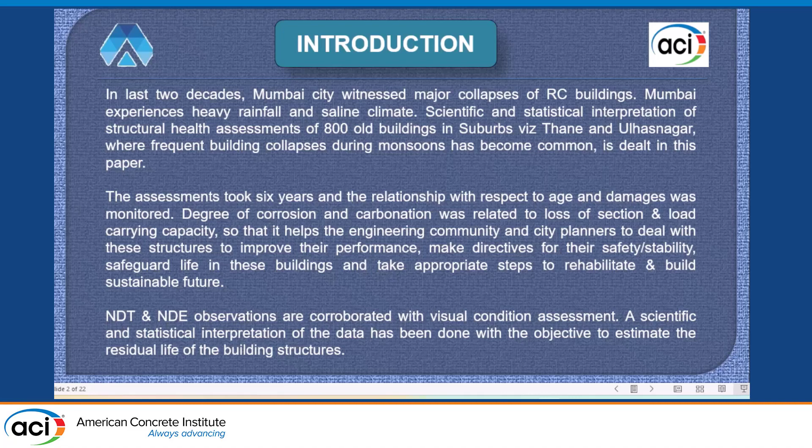What I was telling is, advanced technology is a boon as a result of learning from failures. Failures have always guided us in making new innovations, technologies, and research. Such incidences and socio-economic issues have inspired the author, that is myself, to do such big data analysis.

I am Aniruddha Nakhawa, structural engineer from Mumbai, presenting to you the state-of-art assessment of 800 non-engineered and engineered buildings in Mumbai for corrosion, damage, and residual life.

As we know, Mumbai is experiencing heavy rainfalls and saline climate. There are many collapses that have happened in the last couple of decades, through which the government and civic bodies are continuously improvising steps to take place, so that in the near future we avoid such collapses. This research will be of use to many such planners in big cities as well as globally.

This assessment took 6 years, and the relationship with respect to age and damage was monitored. Degree of corrosion and carbonation was related to the loss of section and load-carrying capacities, so that it helped the engineering community and city planners deal with these structures to improve their performance, make directives for their safety and stability, and safeguard life in these buildings, and take appropriate steps to rehabilitate and build.

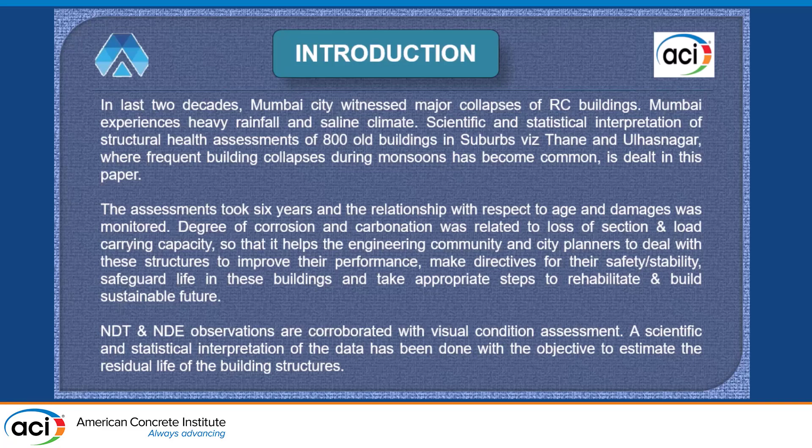Sustainable future. NDT and NDE are corroborated with special visual condition assessment. A scientific and statistical interpretation of the data has been done with the objective to estimate the residual life of these structures.

Friends, we live in an urban century where more than 50% of the global population lives in urban areas. The United Nations estimates that by 2030, 5 out of 8 billion of the world's population will live in urban areas.

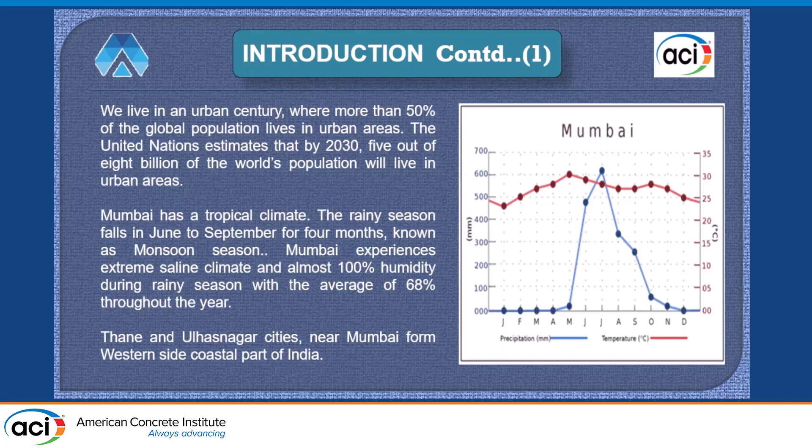Mumbai has a tropical climate, as you can see in the adjoining graph, which shows precipitation, temperature, and rainfall in the area. The rainy season falls from June to September, known as monsoons in India. Mumbai also experiences extreme saline climate and almost 100% humidity during the rainy season, with an average of 68% humidity throughout the year. Thane and Ulhasnagar cities near Mumbai form the western side coastal part of India.

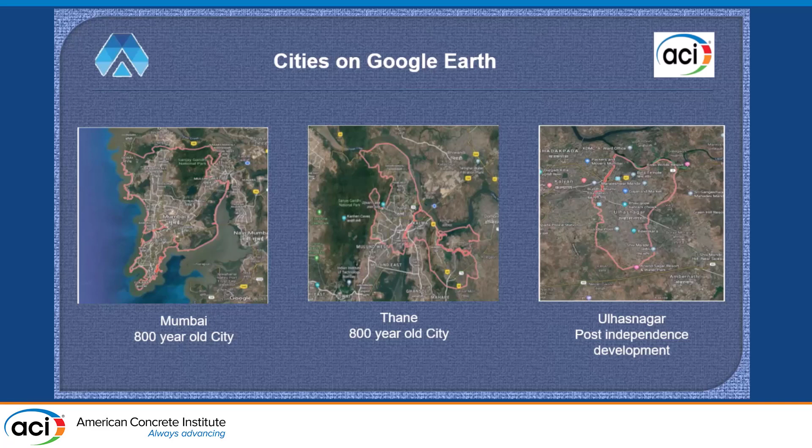You can see these Google Earth pictures. Extreme left is Mumbai, which is an 800-year-old city developing gradually and now running to compete with the world. Thane is also a suburban 800-year-old city. Ulhasnagar is a post-independence city, meaning its development started after 1947.

The 800-year-old historic suburban Thane city with a population of 18.5 million is distributed over an area of 147 square kilometers. It is the 16th most populated city in India as per the 2011 census. Evidently, it is the heavily populated city on the coast. You might be thinking why I am specifying these statistics.

This is just to know. The table below will show you how many people live in such dilapidated buildings. According to civic records, nearly 20% of Thane city's population is residing in structurally unsafe buildings which have been declared as dilapidated structures by the authorities. Moreover, these buildings are unauthorized and occupied at the risk of fatalities, which may arise due to structural failures, earthquakes, and fire hazards.

In the last 2 decades, more than 162 fatalities and 120 injuries have been caused due to incidents related to such dilapidated buildings. When we look at the scene, a small city like Ulhasnagar is comparatively of recent origin. Around 10,000 buildings with almost 95% of these constructed as non-engineered buildings. 864 buildings of these have been declared as dilapidated by the civic body.

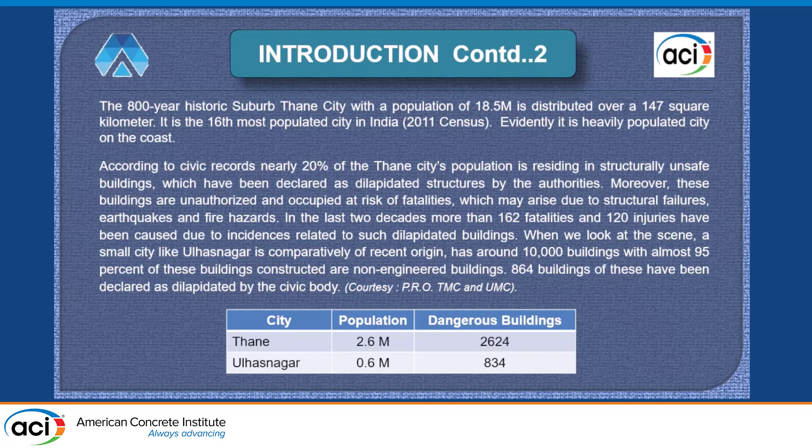You can see in Thane city there are 2.6 million people living in 2,624 buildings, and in Ulhasnagar 0.6 million people living in 834 dilapidated buildings.

As mentioned earlier, there is a large inventory of non-engineered and semi-engineered structures in and around Mumbai. These structures come for repairs, restoration, as well as collapses at regular intervals. These not only result in loss of property and invaluable life of ignorant, gullible occupants. This process happens year after year.

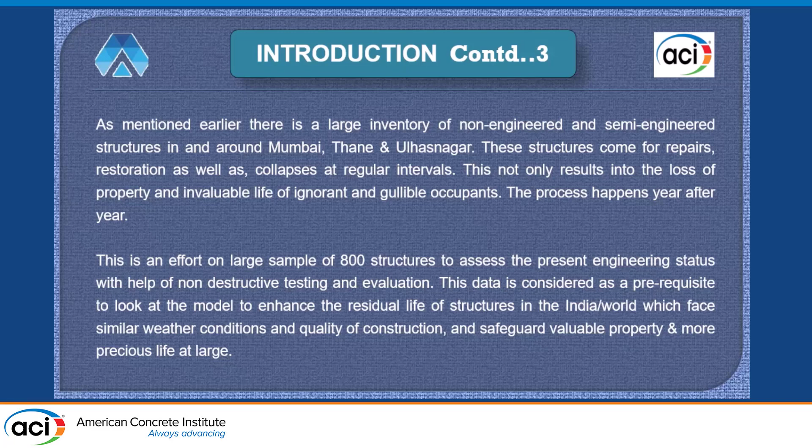This is an effort on a large sample of 800 structures to assess the present engineering status with the help of non-destructive testing and evaluation. This data is considered a prerequisite to look at a model to enhance residual life of structures in India and the world at large, which faces similar weather conditions and quality of construction, and to safeguard the valuable property and more precious life.

Let's see what methodology we adopted for the data. A sample of 800 buildings was used. The sample type included low rise as well as high rise up to 9 stories. These buildings were RCC framed as well as load bearing structures, or a combination of both. The year of construction of this sample was from 1900 to 2007. The period of inspection carried out for these 800 buildings was 2013 to 2019.

Initially, structural health assessment behavior with respect to age and damages was monitored, including NDT and NDE. Representation of this data for 800 buildings on a worksheet was done as below. This is a sample worksheet where you can see the job location, name of the building, year of construction, age at the test date, type of structure, carbonation depth, UPV in kilometers per second, and the half-cell potentiometer for both the cities was included.

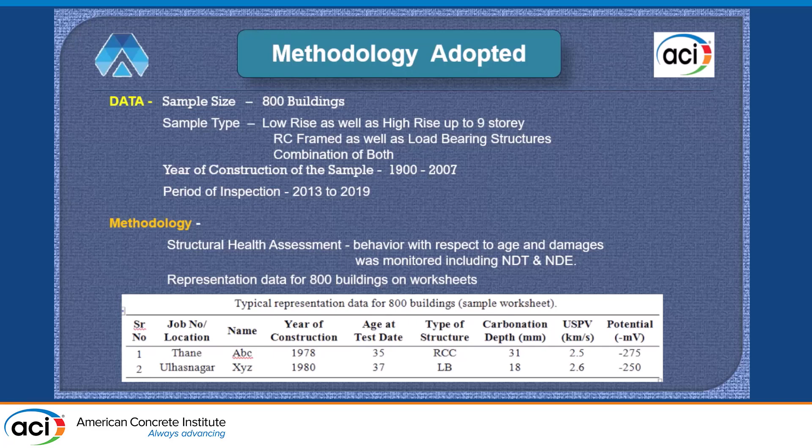We carried out a health assessment drive in order to ascertain the level of distresses and damages, arrive at appropriate conclusions, and derive recommendations. Conventional structural health assessment, referred to as structural audit in India, was carried out by adopting a sequential procedure: studying architectural and structural drawings, design criteria and design calculations were considered. We prepared as-built drawings, visual inspection, non-destructive testing, partial destructive testing, push-over analysis, and then conclusions and recommendations.

I am not going into detail of this because this paper has its own limit, this presentation has its limitations.

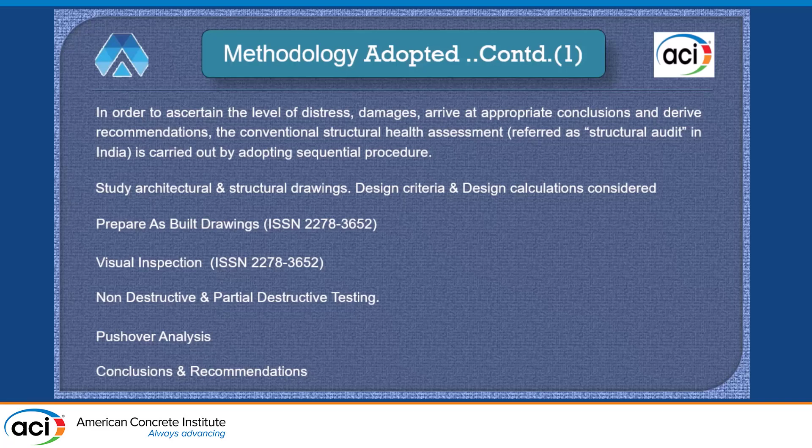Methodology adopted also further included categorizing these buildings based on the conclusions and recommendations arrived at in each individual case, categorized as per civic authorities' guidelines and codes in India. The categorization of the buildings as per the assessment reports included C1, C2 and C3 categories. Namely, C1 is structures to be razed down, C2 structures to be repaired, and C3 structures satisfactory and requiring maintenance. There are a total of 98 buildings in C1 category, 261 in C2 category, and 258 in C3, totaling 800 structures.

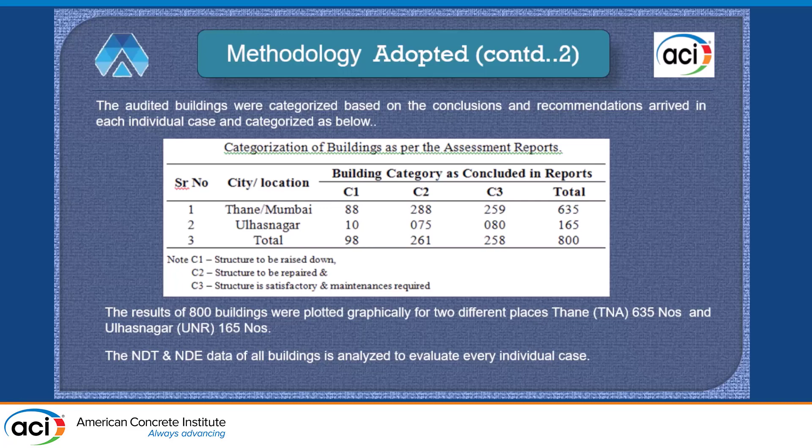The results of the 800 buildings were plotted graphically for two different places, Thane and Ulhasnagar. The NDT and NDE data of all these buildings were analyzed to evaluate every individual case.

The interpretations are presented in statistical form and results are plotted by segregating the buildings according to their age as on the day of testing. The sample of buildings was further clustered as per the age, the period in decades of construction. The results of individual structures become part of the data of the decade it belongs to.

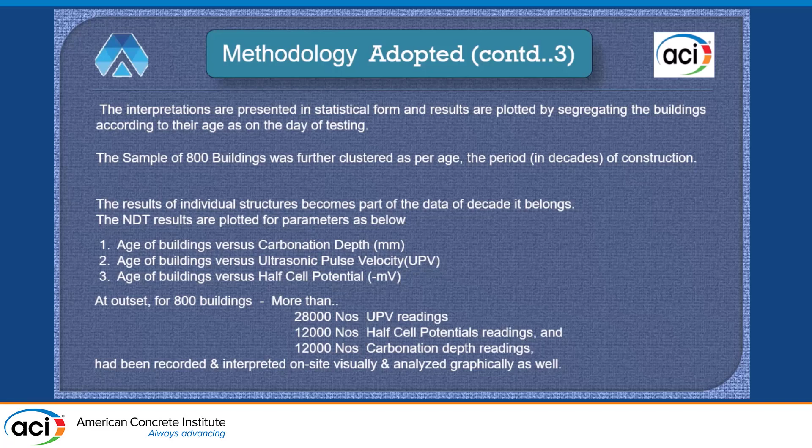The NDT results are further plotted for parameters as below: age of building versus carbonation depth, age of building versus ultrasonic pulse velocity, age of building versus half cell potentiometer. At the outset, for the 800 buildings, more than 28,000 UPV readings, 12,000 plus half cell potential readings, and 12,000 plus carbonation depth readings were taken.

These were recorded and interpreted on site visually and analyzed graphically as well. As mentioned earlier, the groups included, for ease of calculation and understanding, the time period calculated for year of construction and day of testing, where these periods include buildings existing before 1958, 1959 to 1969.

1969 to 1979 and so on till 2019. Similarly, for the other city it was done. The non-destructive testing results of the buildings existing in both cities are plotted for carbonation, corrosion, UPV with respect to age of building at the time of NDT testing. These comparisons are plotted separately for each decade from 1959 to 2019. Further, for global interpretations, all these parameters are plotted independently for both cities over the 60 year period.

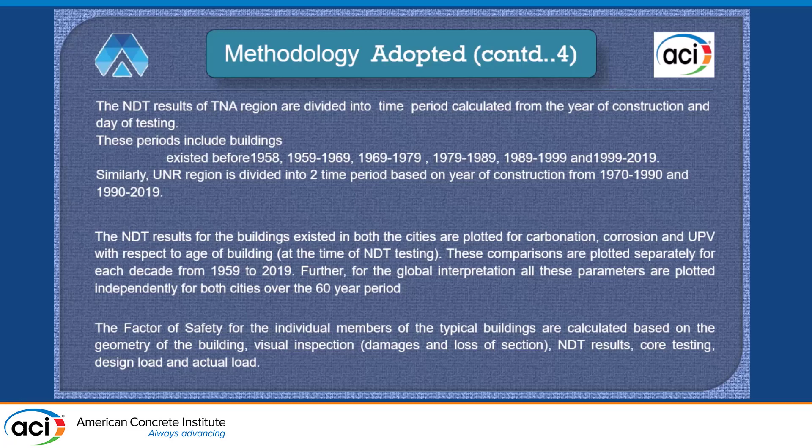The factor of safety for individual members of typical buildings are calculated based on geometry of the building, visual inspection, damages and loss of section, NDT results, core testing, design load and the actual load. This is a typical worksheet for calculating factor of safety from pushover analysis and results.

You can see we have typical data put on column, beam and slab, concrete section, the design effective area, and the effective area as on the date of testing.

Similarly, the reinforcement which was at the time of design, the effective reinforcement which is available after the corrosion, and the actual load in kilonewtons which is there on the building as on today on the section.

The section capacity, design and actual, was worked out, and the factor of safety was worked out as per the Indian standard codes of practice, that is IS 456, 2010, which prevails in India and we have to follow that.

They were tested in compression as well as flexure.

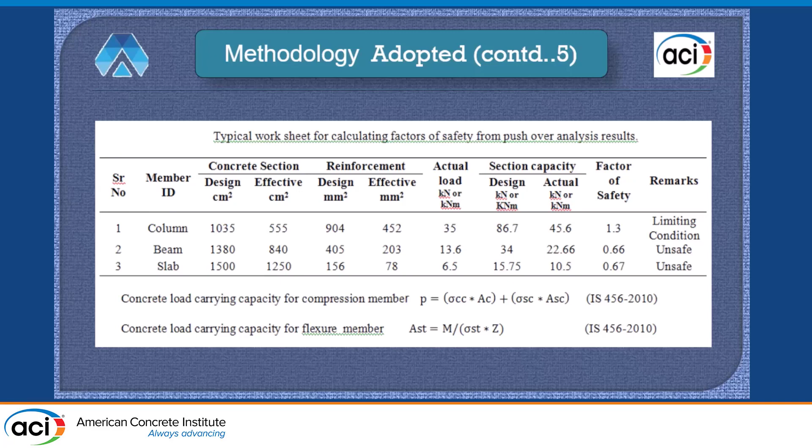For the interpretations of these, we prepared more than 2400 graphs for each case, that is 800 into each test. We had 3 tests, so 2400 graphs were prepared, and these graphs were compiled as per the decades also.

For example, for 1960 to 1970 there are 10 buildings, so individually also the graphs were prepared, and a cluster of 10 for 10 buildings also the graphs were prepared, and for further global interpretations these graphs were extended to the global graphs.

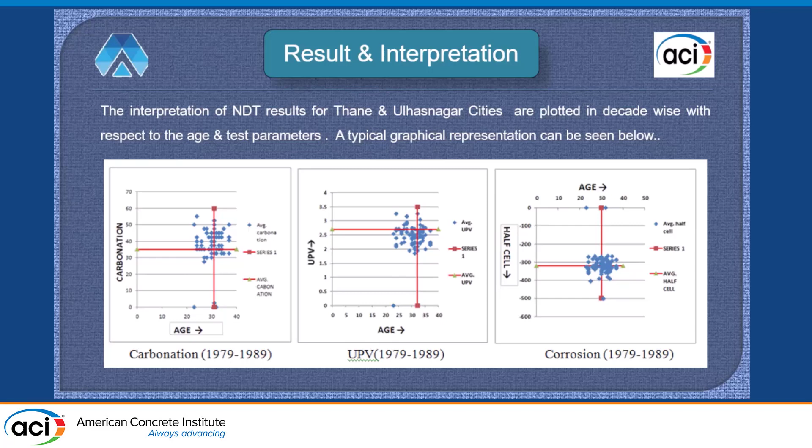Similarly, you can see the graph for age versus UPV and age versus half cell potentiometer. And these are the graphs for the average over the overall period for Thane city.

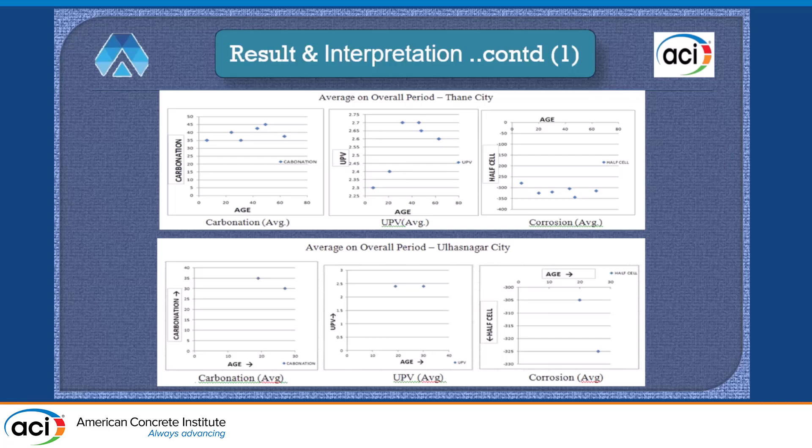The graphs which you see at the top are for Thane city, and the graph for Ulhasnagar city are the ones at the bottom, for all the 3 tests, and these were further combined together to form the final graph.

In addition to the above independent interpretation of NDT results, a combined analysis to study the effect of damage, corrosion, carbonation, environmental effects, type of exposure and use with respect to age of the buildings are presented in tabular as well as graphical form. This is the global graphical representation.

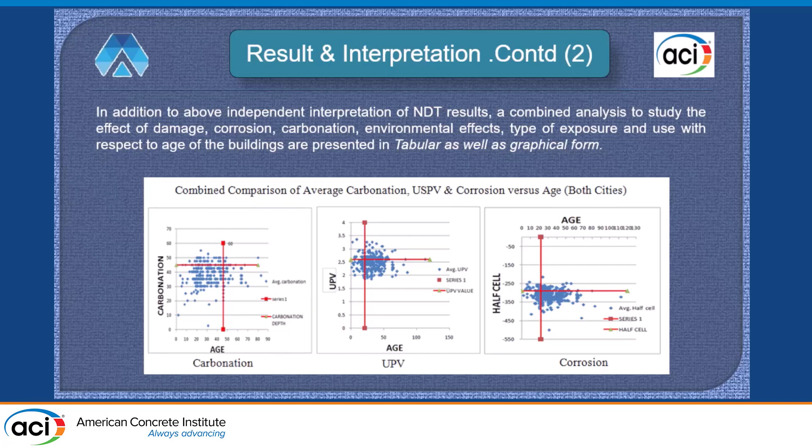In the next slide I am showing you the tabular form of combined comparison of average carbonation, UPV and corrosion versus age of the cities.

For both the cities, you can see the carbonation depth averages, UPV and half cell readings, and from these the averages are taken for all the decades for city 1, then for Ulhasnagar city, that is city 2, the averages are taken for all the decades, and for both the cities the total averages have been taken.

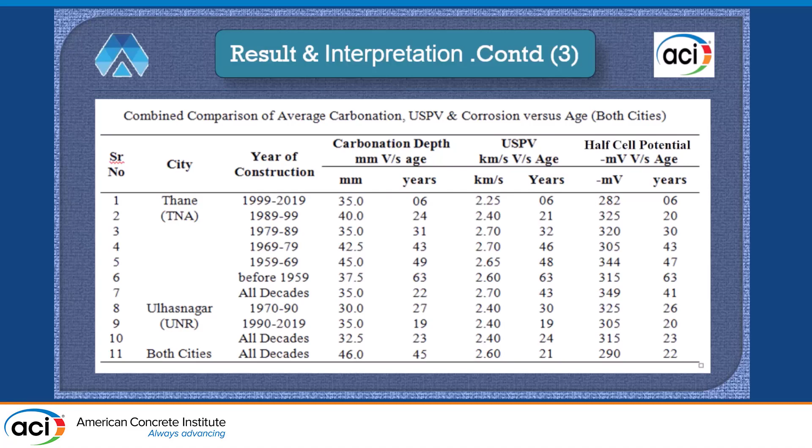Let's look at how the results were arrived at and how the interpretation was done.

Based on the above observations, it can be seen that in Thane city, where the sample was 635 buildings, maximum carbonation is seen to be initiated from 22 years of age for buildings constructed in the period of 1989 to 2019.

The rate of carbonation is estimated in the range of 1 to 1.25 millimeters per year for buildings constructed before 1989, whereas it can be seen that it has increased to 1.5 to 2 millimeters per year for buildings constructed in the period of 1989 to 2019.

The average rate of carbonation for all buildings is estimated to be 1.59 millimeters per year.

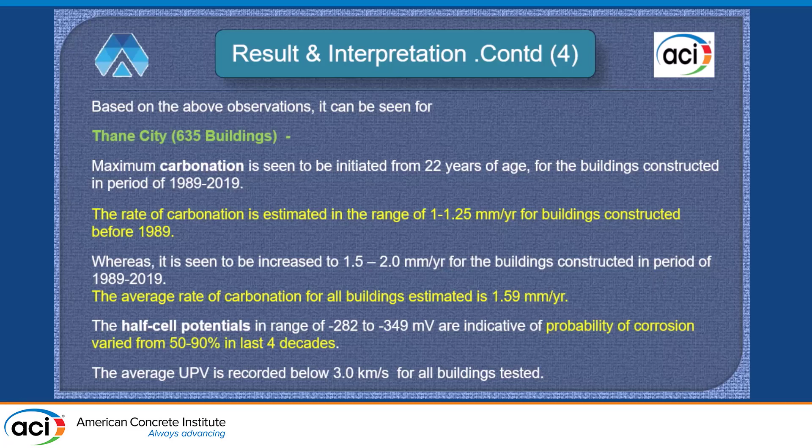The half cell potentials are in the range of minus 282 to minus 349 millivolts, indicative of probability of corrosion varying from 50 to 90% in the last 4 decades. The average UPV is recorded below 3 kilometers per second for all the buildings tested in city number 1, that is Thane city.

For the second city, that is Ulhasnagar city, the maximum carbonation is seen to be initiated from 15 years of age for buildings constructed in the period of 1990 to 2019.

The rate of carbonation is estimated to be 1.1 millimeter per year for buildings constructed before 1990, whereas it is seen to increase to 1.8 millimeter per year for buildings constructed in the period of 1990-2019. The average rate of carbonation for all buildings estimated in Ulhasnagar is 1.45 millimeters per year.

The half cell potentials varied from minus 305 to minus 325 millivolts, indicative of probability of corrosion varying from 50 to 90% in the last 4 decades. The average UPV recorded below 3 kilometers per second for all buildings tested.

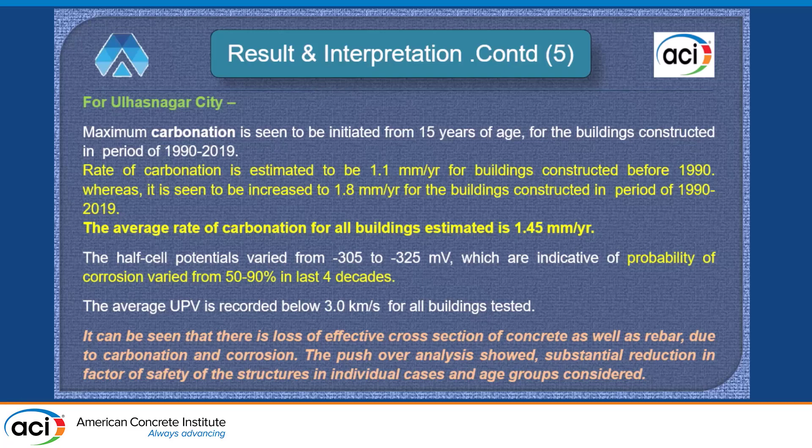It can be seen that there is a loss of effective cross section of concrete as well as the rebar due to carbonation and corrosion. The pushover analysis showed substantial reduction in factor of safety of the structures in individual cases and age groups, as per the decades considered.

The methodological conclusions: the methodology adopted to assess the level of damage and corrosion with respect to age of the structure from available scientific as well as statistical data, in each individual case and group.

From overall observations, analysis and interpretation in this case study of 800 buildings, where more than 90% of the buildings assessed are non-engineered, it can be concluded that buildings constructed before 22 years of age, that is before 1997 in Thane city, and before 15 years of age, before 2004 in Ulhasnagar city, have performed better than those constructed thereafter, respectively.

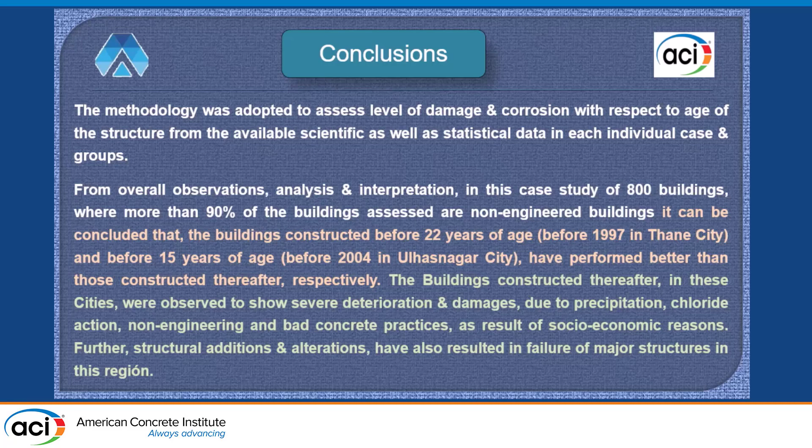Buildings constructed thereafter in these cities were observed to show severe deterioration and damages due to precipitation, chloride action, non-engineering and bad concrete practices, as a result of socio-economic reasons. Further, structural additions and alterations have also resulted in failure of major structures in this region.

The range of years where the design life appears to cease is where the residual life of the building begins. Though a critical task, a well-versed expert can have his hands on it.

It is apparent that buildings with age 22 years and above in Thane city, and age of 15 years and above in Ulhasnagar, are strongly recommended for detailed structural health assessments, followed by appropriate strengthening measures.

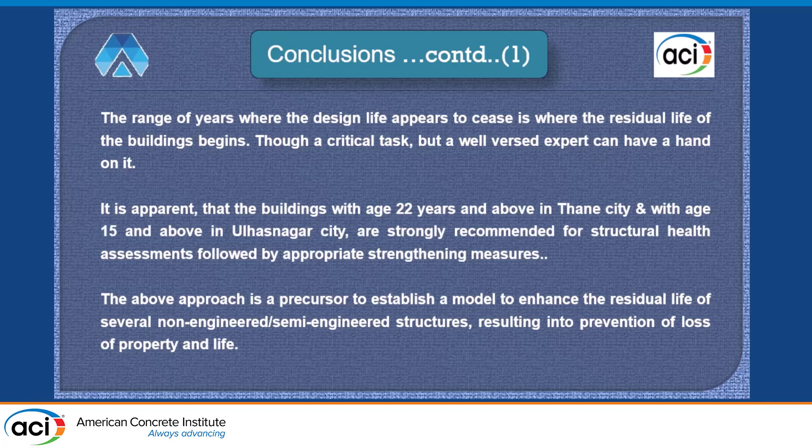This approach is a precursor to establishing a model to enhance residual life of several non-engineered, semi-engineered structures, resulting in prevention of loss of property and life.